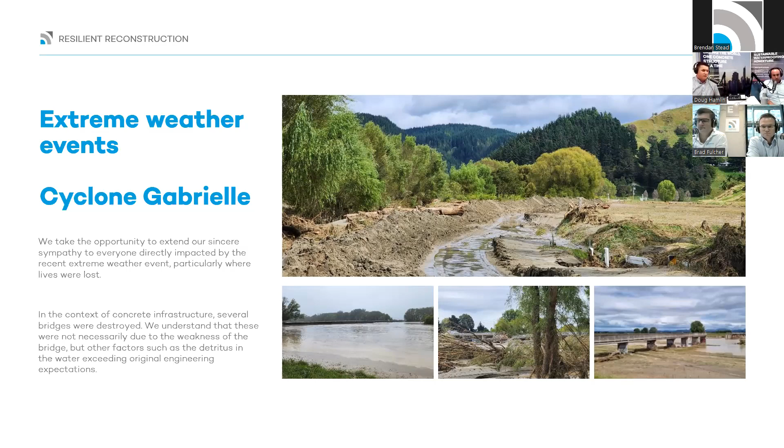So what it has highlighted, though, is the need to look after concrete structures and make them more resilient, stop deterioration happening slowly over time, in view of getting the best service life out of them.

Now, while a lot of structures may not necessarily have suffered catastrophic failure, they are affected by these weather events that are happening across New Zealand, across Australia, indeed around the world. And like I said, it's very slow, but it's a very sure thing that concrete does degrade over time, like anything, but specifically with concrete.

And we really need to think about it a lot deeper, how we can extend that service life, make these structures more resilient, and do all that we can to protect against the effects of these weather events. One example that springs to mind is when a structure is completely submerged, the concrete gets saturated, loaded up with moisture, loaded up with contaminants, and then it dries out during the summer months. That cycle is very harsh on concrete, and it needs to be protected against.

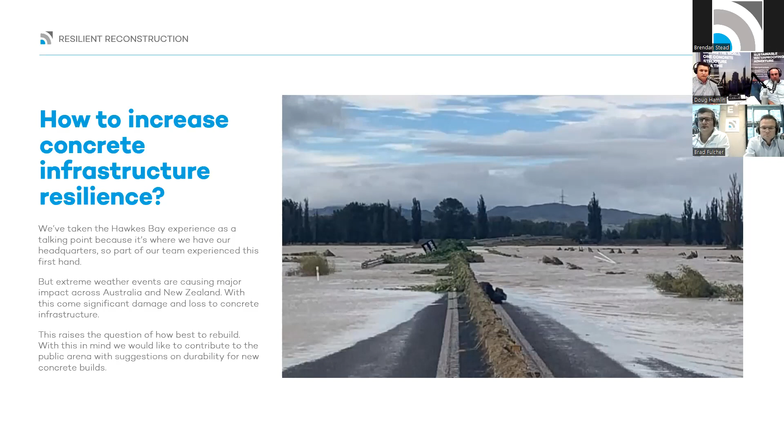One of the things we are going to have a look at now is some of the impacts that these challenges can have on our infrastructure. Some of the things we're going to look at here are the cost of new construction and the cost over the structure lifetime. Those two things are part of your original budget, if you like, and then ongoing expenses as well. What we can do to extend the service life of new structures. Our focus here is from new right through to the end of the life cycle of the structure.

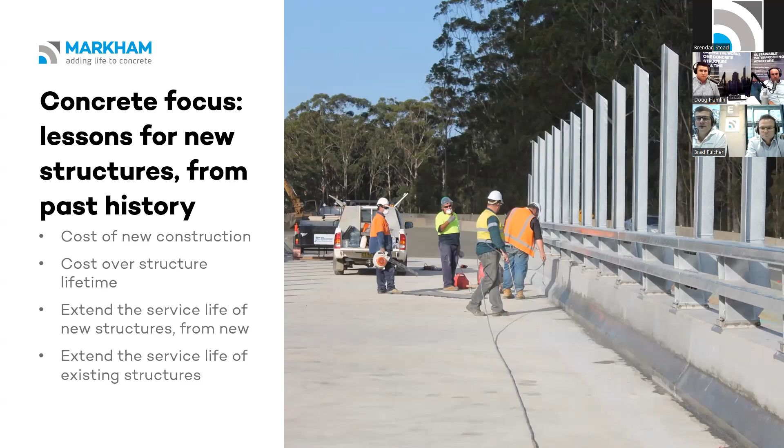So these are some of the lessons that we've seen over the years. Markham's been going for a long time now, so we've seen a lot of things out there from new construction right through to trying to make things last their service life and beyond in some cases. One of the challenges we do see is contamination of concrete. So our main focus here is on the concrete structure itself.

There's a lot of infrastructure out there, such as bridges, wharfs, infrastructure that is used every day, and as Doug was talking about earlier, is a massive part of our life. And when these things break down or are put out of action for some reason, it has impacts beyond what we think at the time, with commutes, getting to work, your goods arriving at your door, all those sorts of things. So a lot goes into it.

I was actually just trying to count up earlier how many bridges I went past on my hour commute to work, but got lost at about 20. So there's a lot of it out there and it impacts everyone in different ways.

So with internal contamination, one of the key points here is that concrete can often look fine from the outside. We see a pretty nice looking concrete structure and think, that's all good, that will last for another 20, 30, 100 years. But there could be a lot going on inside the concrete, which manifests itself a bit later. We're talking things like ASR, carbonation, DEF, and of course the corrosion of the reinforcing steel, otherwise known as concrete cancer. These things can manifest themselves later in the age of the structure, and by that stage major repairs need to be undertaken.

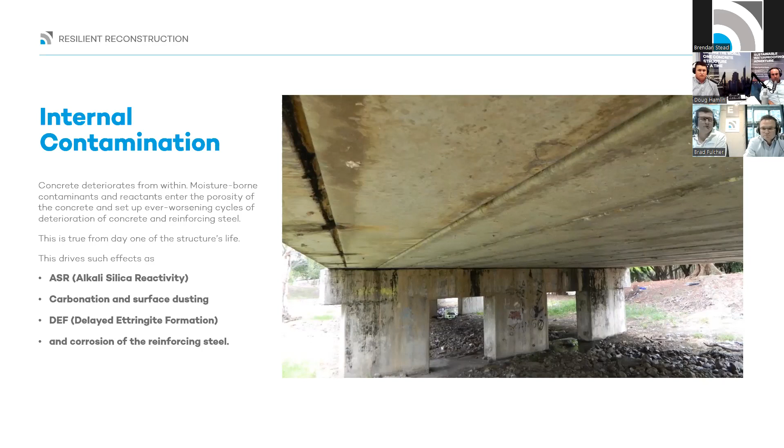You had a few points, didn't you, Chris, on the maintenance challenge that's faced out there by some of the guys that are on this call? Yeah, thanks, Brad. Yeah, it's a massive challenge. With maintenance, right from the beginning, you can be restricted by budget.

So it plays a massive part in the actual construction phase. So don't go short on the actual maintenance side with the budget. You'll pay a lot of extra money down the road. You'll actually see a little bit of a presentation later in the webinar regarding those sort of dollar on dollar figures and how it impacts the actual cost.

So reducing the maintenance costs, think about it right from the start. Lengthen the maintenance cycle. Make the concrete last longer, basically. So yeah, the maintenance, don't go low on your budget, please. It plays a massive part. Yeah, totally agree.

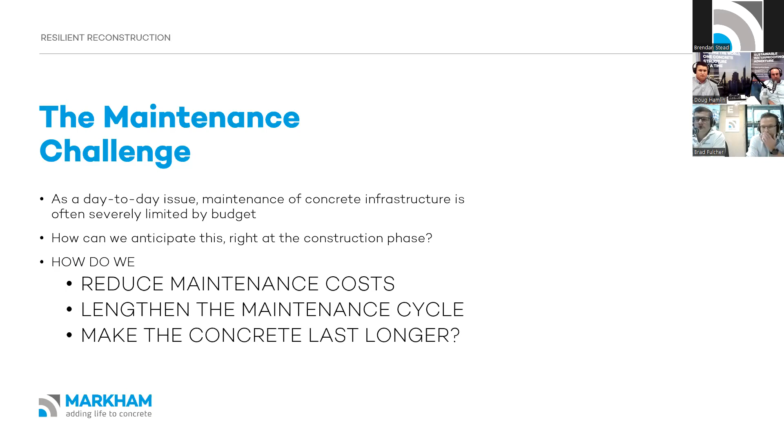One of the other challenges we see more and more nowadays is what we call the carbon challenge. There's a big movement at the moment to reduce our carbon footprint of new construction and also repairs and maintenance of our old structures. So this is a really important factor, if you like, of builds.

Portland cement is a major part of the emissions of concrete, the production of it, the transporting of it. So it's one thing that's been looked at very heavily across the board, really, is reducing the amount of cement in concrete or the amount of concrete in structures. Obviously there's a bit of a trade-off with that as well. So, Chris, you've had a bit of experience with concrete plants. What are your comments around here?

Yeah, so the main focus at the moment in the production of concrete in the ready-mix industry is obviously trying to reduce those carbon emissions, and with that comes new technologies, and around that new technology then becomes space in these current plants or even the existing new plants. They don't have the footprint at the moment to implement these new technologies. So it becomes a major issue for them moving forward.

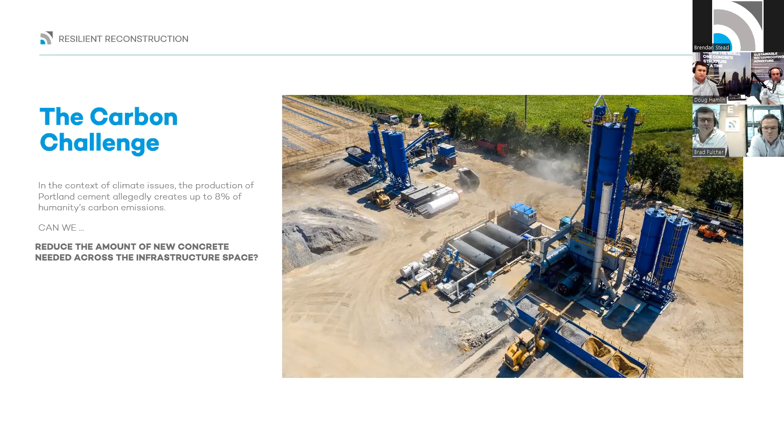So yeah, it's a concern, but guys, there's different technologies out there. They're working through it as we speak, and they will do it in the future. But there's probably a win-win solution there. Doug might have some more information regarding the win-win solution moving forward. Yeah, thanks, Chris. Good overview there. Good topics covered. So, is there a win-win solution?

We feel there is. And I guess it's really around enhancing that durability, that service life, the resilience of the structure. We've talked about the emissions associated with concrete, whether that's in new concrete or in repairs. Can we reduce that need by making the structures last longer? Chris touched on the maintenance topic there.

Typically in concrete structures, you get like a 5 to 10 year maintenance cycle. Thinking about a bridge structure or a marine wharf, something like that, and that is a very costly exercise. Can we push that maintenance cycle out to say 15 years or 25 years, whatever it may be, extend that cycle and reduce not only construction materials and activity, but effectively the cost of that maintenance.

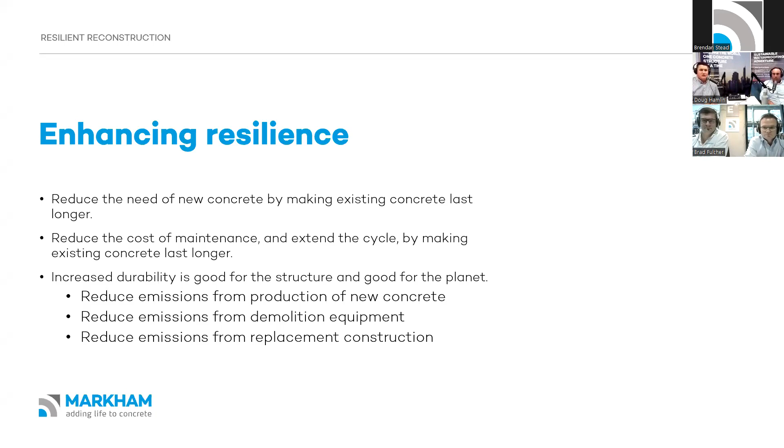Now, in regards to durability, it does pay off in a concrete structure. It is very key. It's the most important thing to service life, and with that, the most important measure, if you like, is the permeability of the concrete. So how quickly moisture can flow through the concrete, and along with moisture go contaminants. So if we can control that permeability in the structure, we have a direct effect on the service life of that structure.

Now, it is important to note that some issues start from day one of a structure's life, whether that's contaminated materials used in the concrete mix, or an extremely cold, extremely windy or extremely hot day, whatever it is, the weather's not favourable and you get shrinkage cracking, things like that. And that can set off or rather accelerate deterioration right from early on, and we start seeing problems long before we should in concrete structures.

So I guess one of the challenges here is around the 100-year design life. In some cases, I'm seeing 120 years nowadays, and is that really achievable in real life, in the real world, so to speak? Now, obviously, from a design point of view, it is.

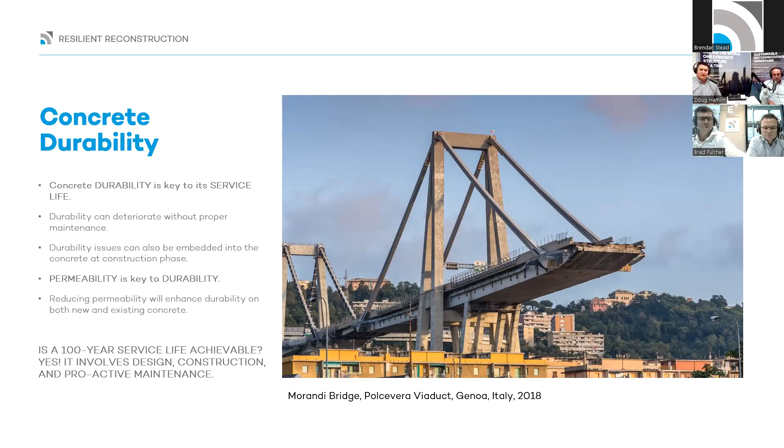Hayden, do you have any points on that? No, it's good. I think concrete is the second most used consumable in the world after water. So it's there, and we need to learn how to deal with it better and extend its life. And what are we doing with it? Those are good points. What you raised about permeability has been a measure, because for a long time now the industry has just focused on MPa, the concrete strength. And there's still a discussion now.

If I take my MPa from a 40 up to a 65, obviously we're using a whole lot more cement and the mix is different. That should be sufficient for durability, and it's not actually right. The point is, even a high MPa concrete will still allow ingress of moisture and contaminants over time. So we've got to think differently, and we've got to think about permeability, and that's probably a big challenge we want to put out there today.

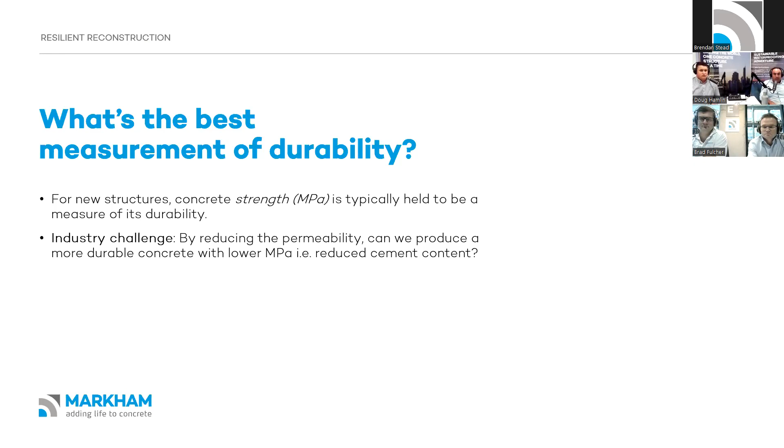Let's have a bit of a mindset shift there on what can be done to reduce that permeability and increase durability in doing so, because you can actually pull back on cement usage and content by looking at different methods of increasing its resistance to moisture migration. So I'll throw that out there, and I'm interested in any comments you've got on that.

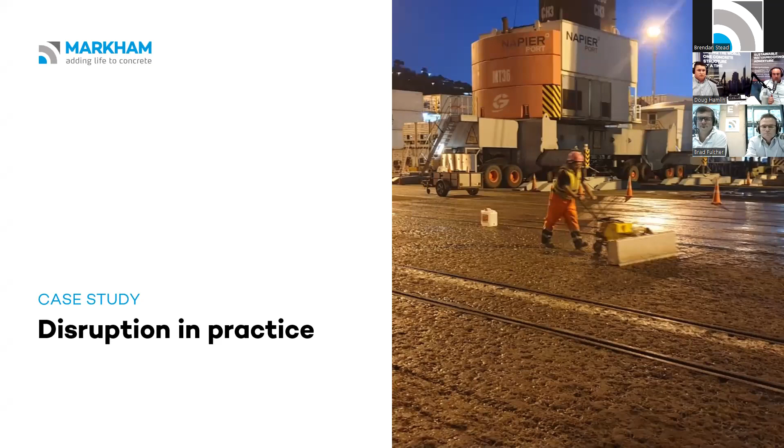So I thought from here, it was probably a good idea to have a look at what can actually be done now. We're probably all sitting there with structures in our minds, but what does that mean? What does it look like? We want to put something into practice. Brad, do you want to take us away here? You've been involved with numerous projects.

Yeah, thanks, Hayden. Some really good points there around MPa and permeability. Chris and I were just speaking off air earlier about a case study where they increased MPa to get more durability on a slab pour, but it actually resulted in more cracking. So you do one thing to get more durability, and then you've got another problem on your hands. So it's definitely something we need to think about and look into.

So this first case study we'll run through is Bledisloe Wharf in Auckland. No doubt a lot of people on this call will be familiar with it. We got involved in this project in 2001. They'd just done a condition assessment on the wharf, and it had a few issues: a pretty high level of chloride ions, so it's fairly contaminated. They were seeing the result of that, with spalling and cracking. So something needed to be done.

One of the recommendations in the report was to knock down the structure and rebuild it. So they came to us with that in mind, looking at what we could do to keep the wharf going for another couple of years while they got their design and budget sorted to put a new wharf in. We used one of our spray-applied treatments, Civiltech Acron 7000. The wharf was cleaned down, and this was spray applied to the concrete.

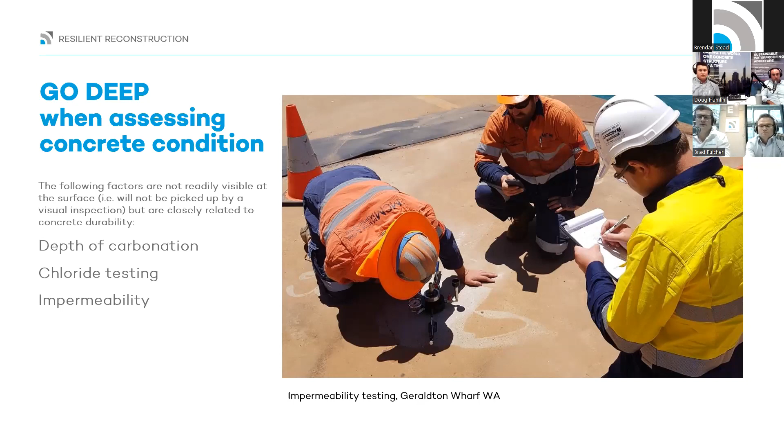Hayden, do you want to touch a bit more on what we said about acting early, how important that is? Yeah, cheers. Good points about actually seeing what's happening inside the concrete. It's so easy, and there's a lot of visual inspections that take place. You see consultants go out, visual inspections, even visual mapping with technology nowadays. But we probably back off from actually getting to the root of some of the issues, what's developing inside the concrete. So good point. Acting early, as I spoke about at the start.

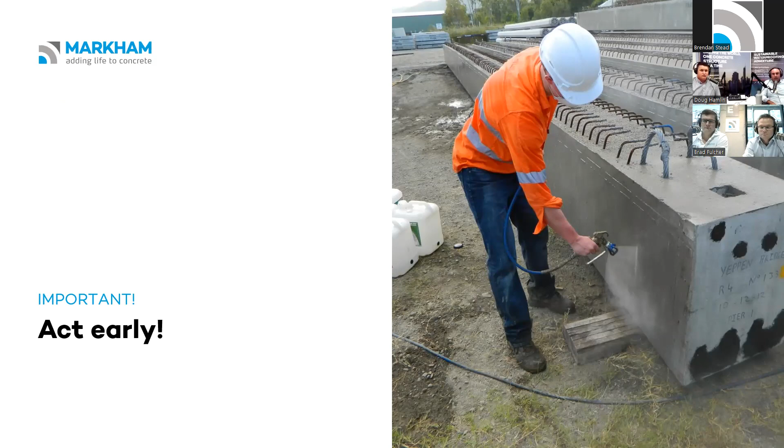So acting early, proactive maintenance. That's about thinking about it now to save for the future, essentially. What can be done at this point on a new structure, what can be done when managing or assessing an existing structure that's got signs of corrosion or high chloride levels, things like that. What can be done now to extend the service life?

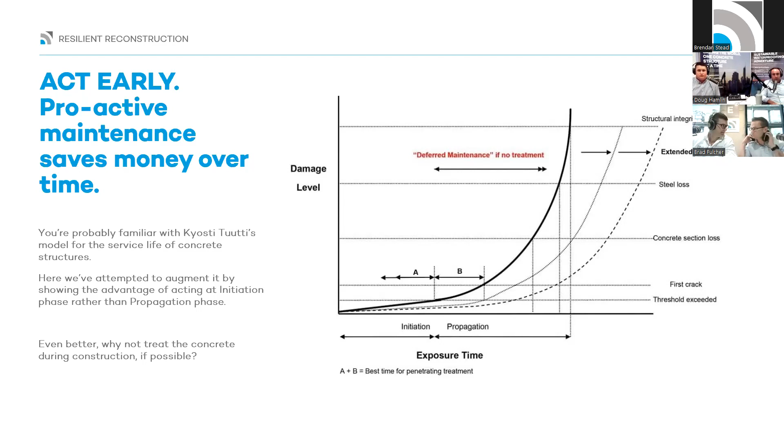So I think the point is, if we get in super early at construction, that really extends that curve. We can't quite flat line it, but you can make a big difference on your structure, for your client or your own asset, in giving it more service life. It's an interesting thought.

But the point is, if we spend slightly more at that point, when we've got time to think and the ability to act, we're saving huge amounts of time and money through those phases. And if you don't get it in phase A, you can still catch it in phase B and push out that curve, and you're still saving a lot of time.

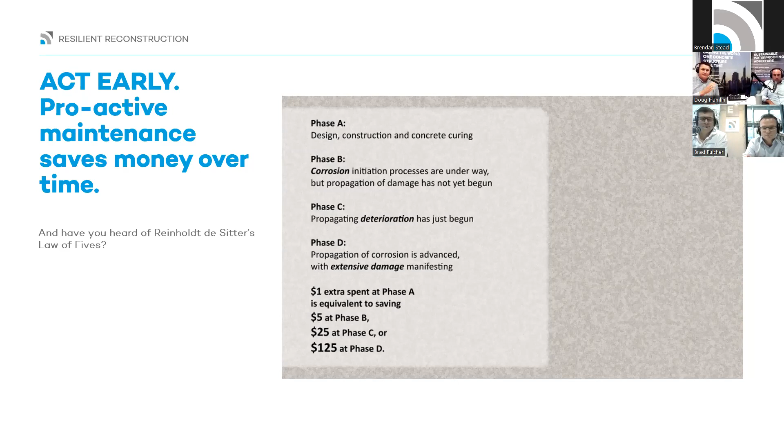Yeah, it's good. And just what you finished off with there: if we can't get it right at the start, if we can get it in those second and third phases, we're still a multiple of 5 or 25, whichever way you look at it, times more cost effective than if we did nothing and let it go right through to major repairs. That's good. So good points, guys.

So going back to that point you guys just had there before. If you go back to the maintenance challenges I mentioned beforehand, don't restrict your budget just because of the dollar value. If you look at that, it actually blows it right out. So over a number of years, it's going to cost you a lot more money. So on to the next one, guys.

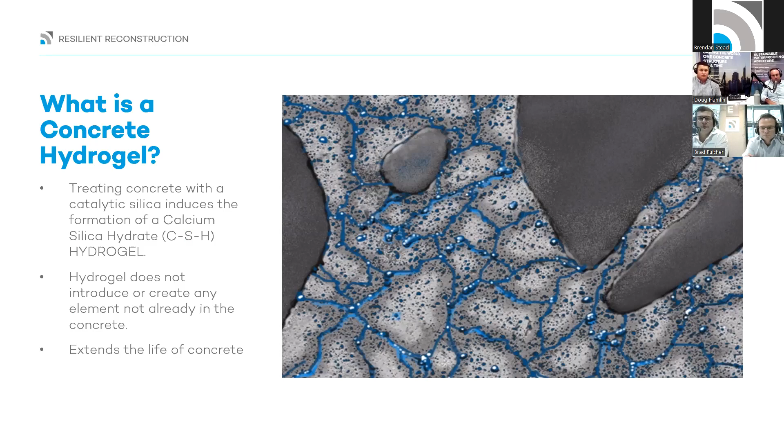So what we're doing essentially is creating the hydrogel inside those porosities and stopping that moisture movement through the concrete. That moisture movement, as we said, is what's taking those contaminants into the concrete and starting off that deterioration. So pretty important to look at that and see what we can do there. Doug, I think you had some other infrastructure examples, especially around getting in early and acting at that phase A that you guys have been talking about.

Yeah, thanks, Brad. The first one I've got here is the Garden Island project. This was in Sydney. What was unique about this project was not only the fact that the precast was protected right from day one. It was actually protected in the precast yard. The precast was sprayed before it even left, before it was even on the trucks to go to site, which was a massive advantage in terms of logistics, construction programming, that type of thing.

So this structure here, right from day one, goes into a marine environment. The airborne chlorides, and in the splash zone, things like that, can't get into that concrete. They can't start that deterioration process right from day one. Did you have anything more on that one, Brad?

No, I think it is important though, especially with acting at phase A, acting early, that the solution we put forward, or that does get used, has to be workable for all parties. So in this instance, as you've gone over, the construction timeline and programming wasn't affected at all. So a good solution from that point of view. Do you agree with that? Yeah, I do. That's good.

Thank you. The next one there was the Glebe Island. This was a structure that actually had salt loaded onto it. So not only being in the marine environment, subject to the aggressive airborne chlorides, it also had been accelerated by the salt piled on top there, and that use had finished, and basically they wanted to keep the structure in that condition.

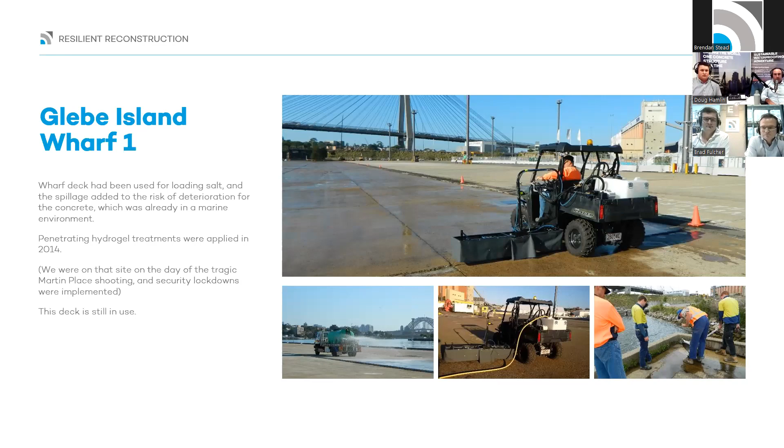So ideal. Yeah. Relates perfectly. I suppose it does show that you're preserving that life again, like the example of Bledisloe Wharf that Brad shared, that rebuild not only cost, but the environment and the impact around cement and production, again, is saved by preservation. So no, it's good. It's good examples.

Right, now let's have a look at some of the questions that are coming. I'll just bring them up on the screen here. There's still time to whack a few more in, guys, if something's definitely on your mind.

So the first one, this one comes up pretty much every presentation. We probably should include it earlier on. How much does this cost per square metre? Throw that one to you, Hayden. Great question. Yes, obviously it does come with a cost, but what I would say, and probably what I say every time, is it's very project specific.

We work with you guys to work out exactly what the needs are, what you're trying to achieve. Is it purely around curing and anti-dusting, or are we going right in to protect the existing structure that's already got chlorides or may have low cover, things like that. I know you're going to say, okay, you're just saying it depends, but the other side of it is you can do it different ways.

On a new construction, you can put it through admixture, so you're getting it right through the mix and the cube, or on a structure, you can spray it per square meter, and some structures need a clean down and things. So probably the best thing to do is have a quick chat to us, send in a plan, things like that. We'll have a quick discovery meeting, and then we work out a cost structure that works for you. Hopefully that's helpful there.

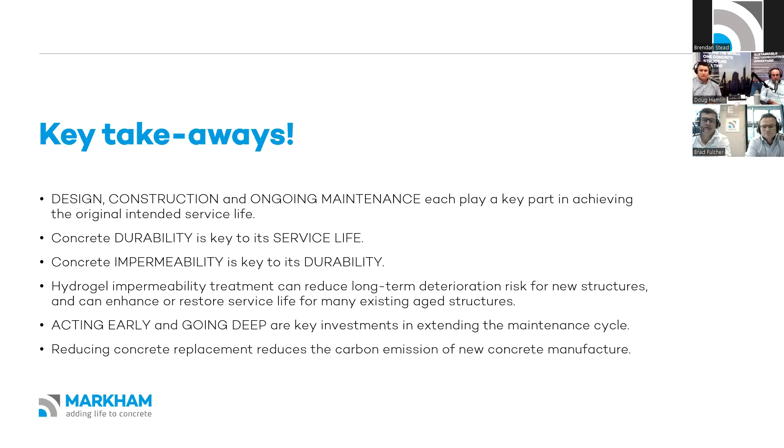Oh, one of the things I did like that came up in the questions was how long can we make the treatments last? How long can they be durable for? I thought that was good. Look, when we're looking at ways to improve structures, that's definitely got to be something we think about. We don't want to get stuck in a maintenance cycle where we're coming back to repair or treat a structure every 2 or 3 years. So making sure what we're doing is going to go the distance and save us that maintenance long term. Thought that was great.